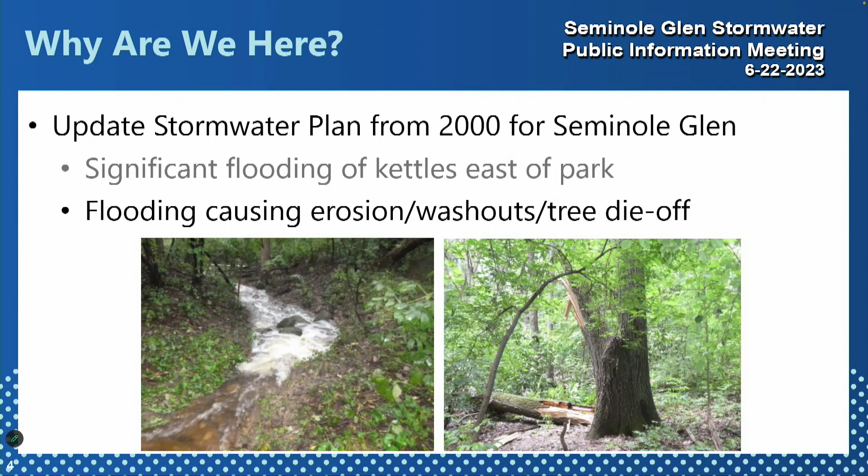One of the things that came out of this study as it got going is that residents also had concerns about water quality, which is an ongoing concern not just in Fitchburg and Dane County, but throughout the state and in all the waters of the U.S. So we're going to touch on that too as we go through this presentation.

Going back to the history of this project, the request for proposals was originally issued in about October of 2021. Some of you may be aware there's been a significant number of staff changes in the City of Fitchburg, which is great, so it just took a while for this project to really get going.

In January of 2023, we had a project kickoff, which involved the first public information meeting here in the City Council Chambers. The meat of that presentation was talking about the goals and objectives, and to really take feedback and comments about concerns and questions, and to give more information about what we were planning to look at.

This is again the project timeline: funding was approved in 2022, in January we had the public involvement meeting, and we'd done some existing conditions analysis at that point. From February until now, we've just finished looking at our 3 to 4 main alternatives and water quality. Right now we are here at public involvement meeting number 2. At the end of June and into July, we'll be finishing the report and doing a project wrap-up.

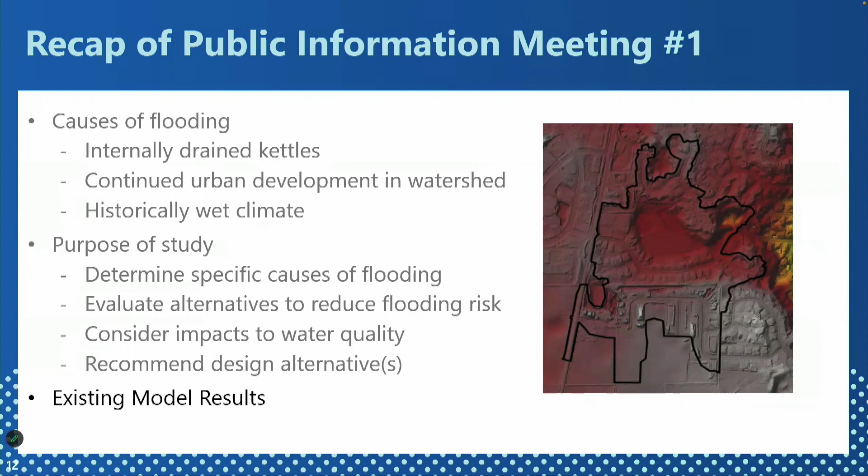So we had also talked about the existing model results, and we'll touch on that a little bit here. This is the outline for this meeting—we're going to talk a bit more about the existing model results as a review, talk about the alternatives we considered and the results of our modeling, and then talk about the recommendations. What do we think is the best approach for reducing flooding risk? And then finally, what are the steps after this project is done? Ben can also talk to that a little more because he's got more inside information on the capital improvement plan.

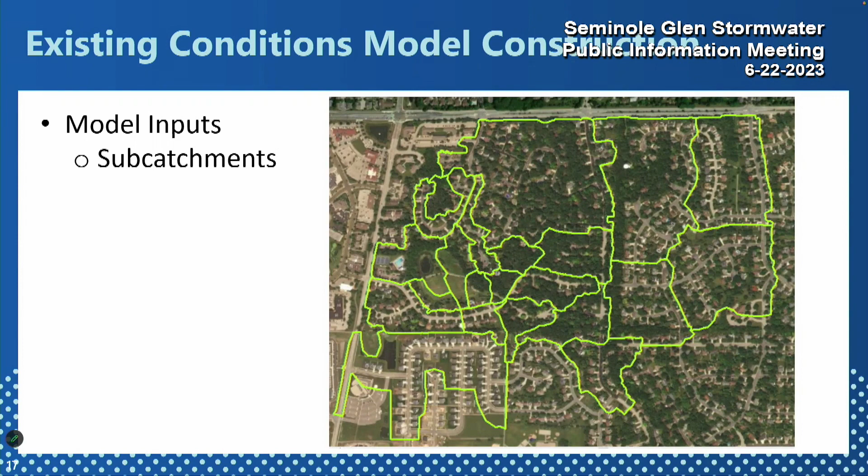So when we look at the aerial photo here, all of those yellow outlines are what we call our subbasins, or subcatchments. Each one generates runoff from the rainfall that falls on it. How much and how fast the water collects depends on many different things: the size of the watershed, is it connected by storm sewer, and what kind of land use is in the watershed. The more houses, the more pavement, again, more runoff more quickly. Storm sewer can also cause water to flow more quickly or collect more quickly.

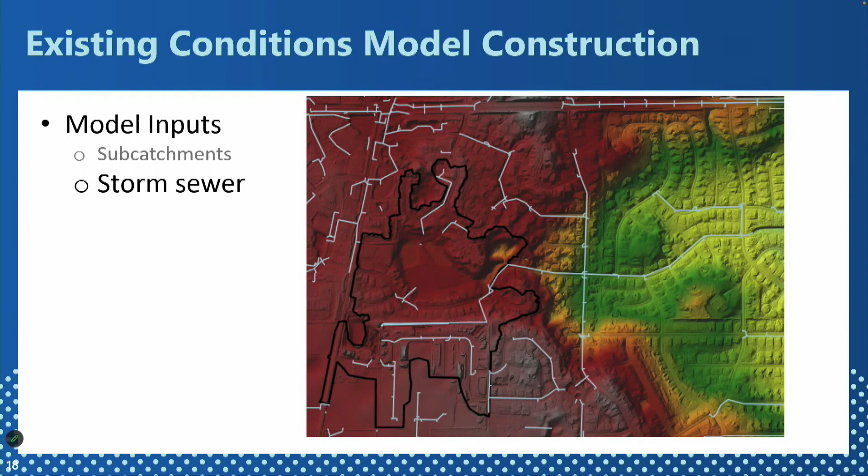So the existing model also looked at storage. The wetlands in the park, as well as the forested kettle at the lower end of the watershed, really behave as large bathtubs. So we actually looked at how big are those bathtubs, how deep does the water get, and once that overtops, how much is overtopping and where does that go.

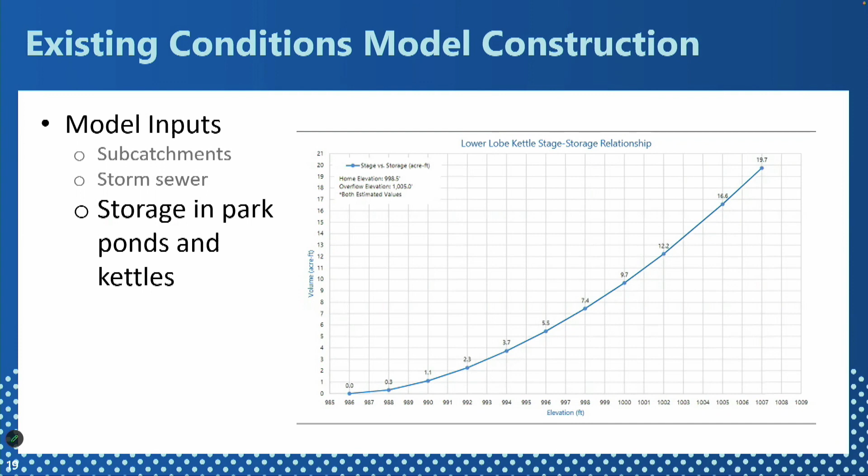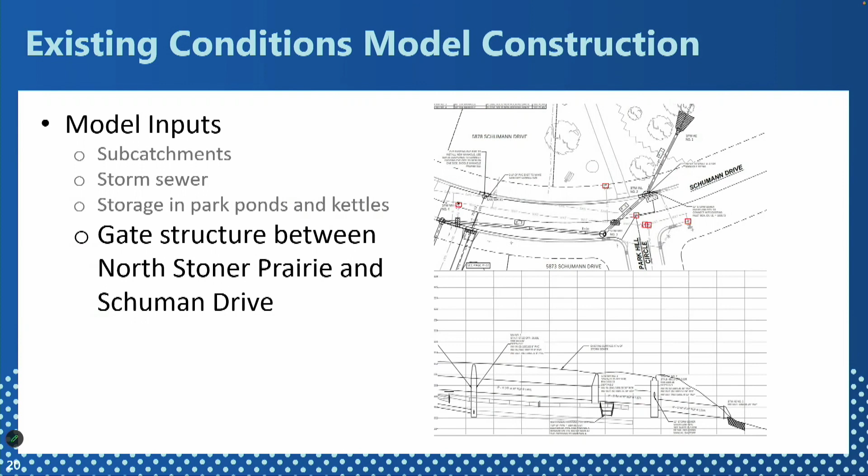So the other thing unique to this project is North Stoner Prairie. When it was developed, as part of their stormwater system, they have a gate which was open during the 2018 event and allowed overflow from their system to get into that lower kettle. That gate has been closed since that event in 2018, but we did look at the impact of that gate, whether it should be open or closed. As we went through this project and looked at alternatives, there was really no upside to opening that gate for any of the design alternatives we looked at.

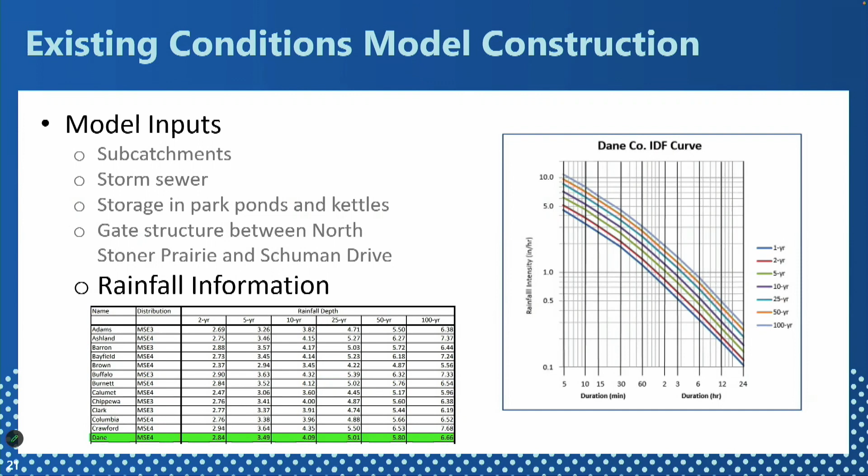And then finally, for the existing model, we looked at rainfall. Again, this is something that is changing over time, and as we gather more data, one of the challenges is we're predicting future rainfall by looking at the past. In some areas, we only have rainfall records going back to early European settlement. And until recently, we were actually doing design in Wisconsin, for the most part, using data from something called Technical Paper 40.

This was a catalog of rainfall that they stopped collecting in 1959. So we were developing current infrastructure based on 70-year-old rainfall data. That's been updated recently in NOAA Atlas 14, looking at rainfall going all the way up to about 2020. It's actually being reanalyzed now for NOAA Atlas 15, looking at changes of climate and the additional risk associated with climate change in the future.

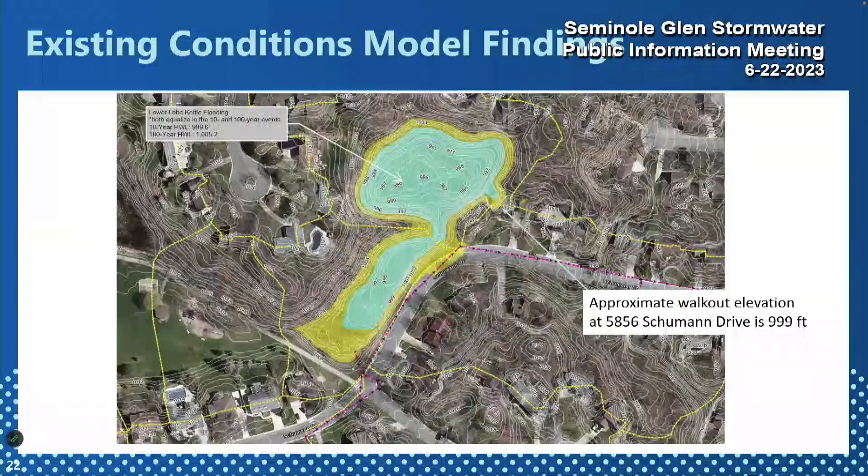So what did we find? Looking at this, especially in the lower area, we found that for the 10-year rainfall elevation, the depth got to about 999.6 feet. And for the 100-year water surface elevation, it was getting to about 1,005.2, at which point it is overflowing and going into Schumann Drive.

The challenge is that at 5856 Schumann Drive, that walkout elevation is approximately 999 feet. So even in a fairly modest event, a 10-year event, which is what we generally design our storm sewer system for, that home could be at risk. So again, overflow to Schumann Drive is definitely occurring at the 100-year event, and possibly even a little bit more frequently.

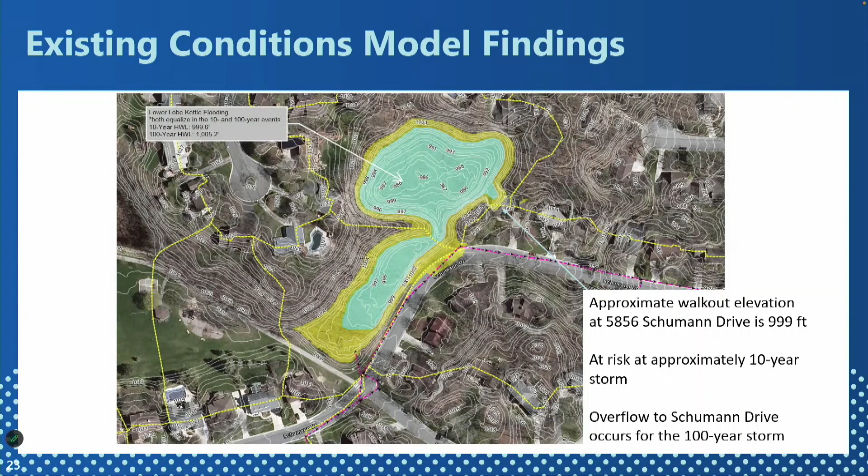Now that we have a handle on the existing conditions, we're going to talk a bit more about the alternatives we evaluated. Alternative one is basically to do nothing. What happens if we just leave the gate from North Stoner Prairie closed and go with business as usual?

Keep in mind that the storm sewer at Schumann Drive is at about elevation 1,000. So that water has to get really, really deep in that lower kettle before it can possibly get into Schumann Drive.

Alternative two is to reconstruct the Schumann Drive storm sewer at a lower elevation with increased capacity. This would also have a passive outlet, so once water got high enough—looking at that 10-year water surface elevation, which has a particular meaning we'll talk about when we get to water quality—that protects the home at Schumann Drive but still allows water to get out of the system.

Alternative three was to construct a berm between the kettle wetlands up in the park and the forested kettle lobes in the lower end, and also to lower the Schumann Drive storm sewer.

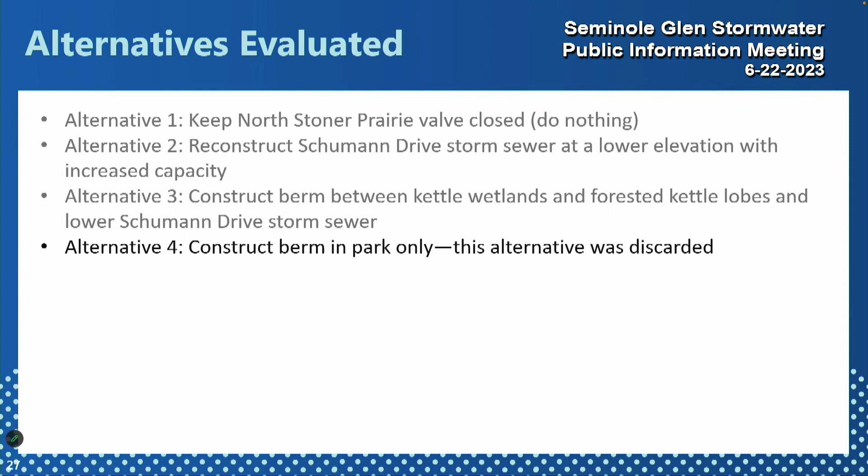Finally, this one we're not really going to talk about much because it didn't have a meaningful impact, was to construct a berm in the park only. That would just increase the storage a little bit in the wetlands within the park to see what kind of impact it would have downstream. While we looked at it in detail, it's pretty intuitive that the kettles in the park are not nearly as big as the forested lobes, and you really can't stack that much water in there to offset what was happening in the forested kettles.

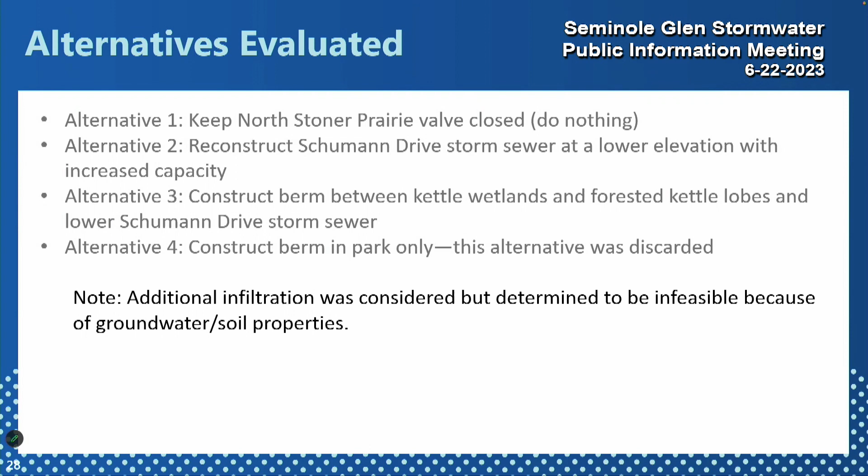We did originally look at additional infiltration, both in the park and other areas, trying to get the water into the groundwater system faster, but it's really not feasible because of groundwater and soil properties. Again, typical with a lot of glaciated kettle wetlands, there's a lot of clay underneath them, so the infiltration isn't great.

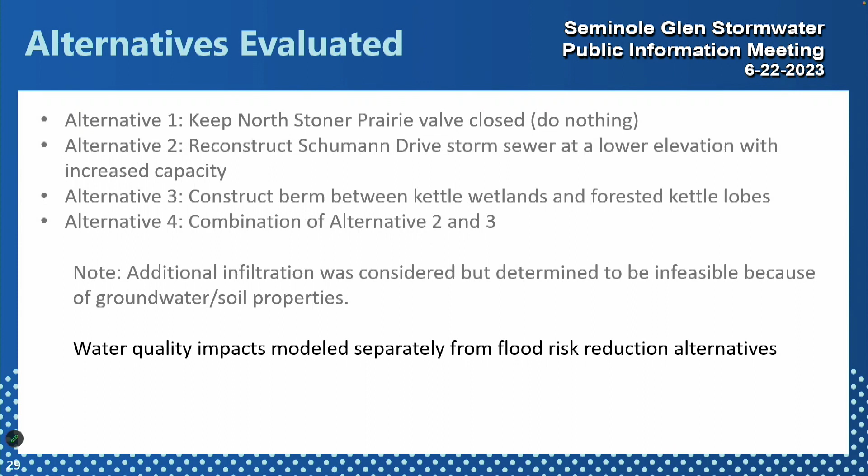Finally, when we talk about water quality impacts, they are modeled very separately from flood risk reduction alternatives. When we're looking at flood risk reduction, we're looking at the 10% annual chance event, sometimes referred to as the 10-year flood. We want to think of that as the storm that has a 1 in 10 chance of happening in a given year. Or even the 100-year flood, when people talk about floodplains, meaning that storm has a 1% chance of happening in any given year.

Now, when we talk about water quality, we're talking about the smaller, more frequent events, because it's those short, small rainfall events that detach the soil and move it away. By the time we get to the bigger storms, the 10-year or 100-year storm, most of what's moved has already moved. The water gets progressively cleaner as the storm gets bigger.

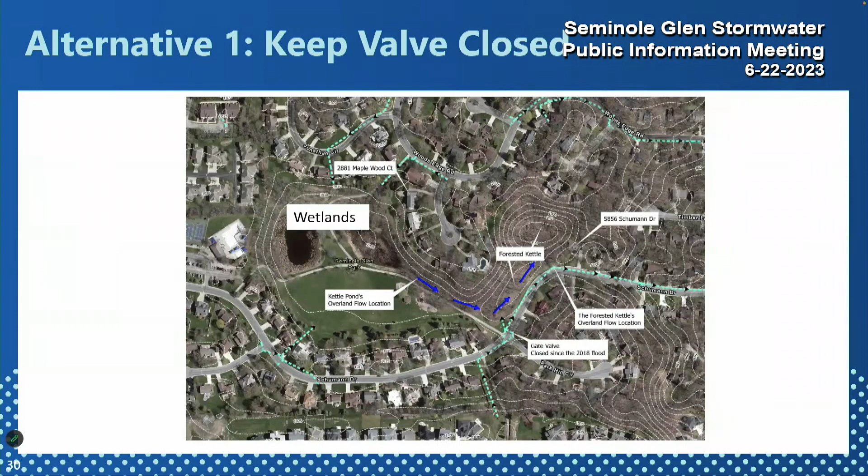So this is a schematic showing what happens if the gate is closed. We have the wetlands in the park, the overflow channel that goes along the bike path, the lower forested lobes, and the gate closed at North Stoner Prairie. We also have the storm sewer down Schumann Drive, but the water just can't get there until it gets deep enough in the kettles.

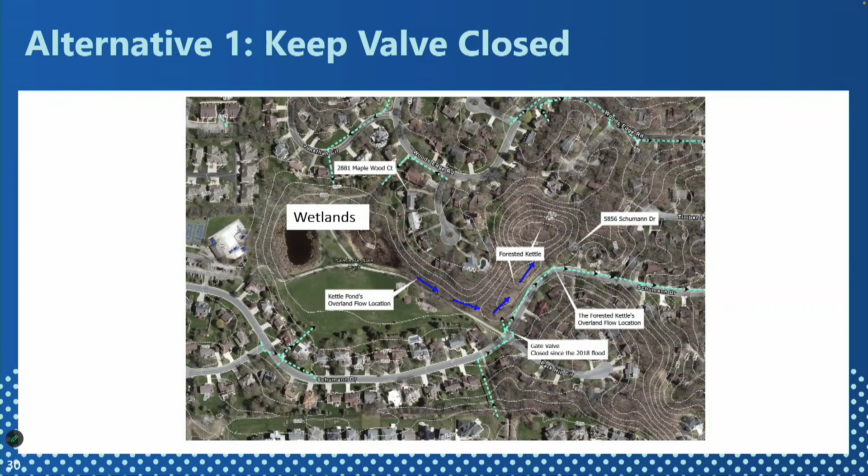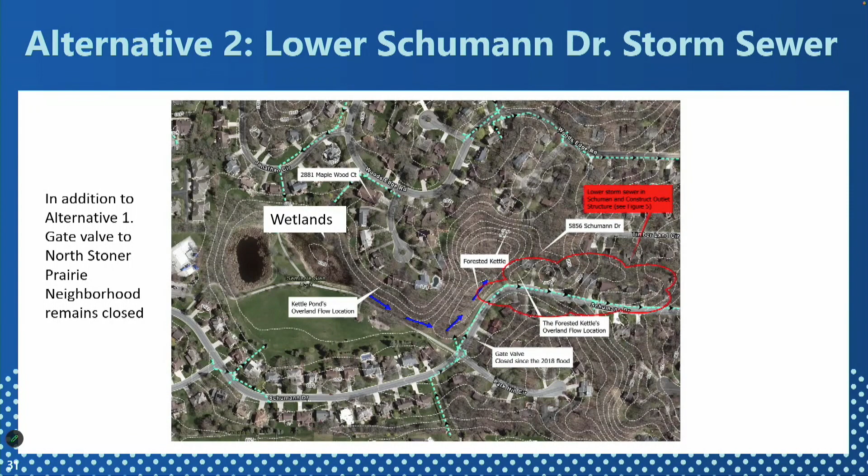We're still keeping North Stoner Prairie gate closed, but where the red outline is, that's the Schumann Drive storm sewer, and that would be lowered. It would also have an outlet, almost like you'd see in a constructed detention basin, to let water passively out of it, and once it gets high enough, it would flow into the Schumann Drive storm sewer system.

This would be a schematic of that passive outlet structure. You'd have a pipe that would be submerged during a storm event. The water would get high enough, it would go over the weir plate in that manhole structure, and the top of that is set at the 10-year water surface elevation.

And then if water gets even higher than that, now you have a grate on top of this manhole that will let water in the fastest and get it down more quickly to that 10-year water surface elevation. So again, the top of the Schumann Drive storm sewer system would be decreased about 992.6 feet, about 7.5 feet lower than it is currently.

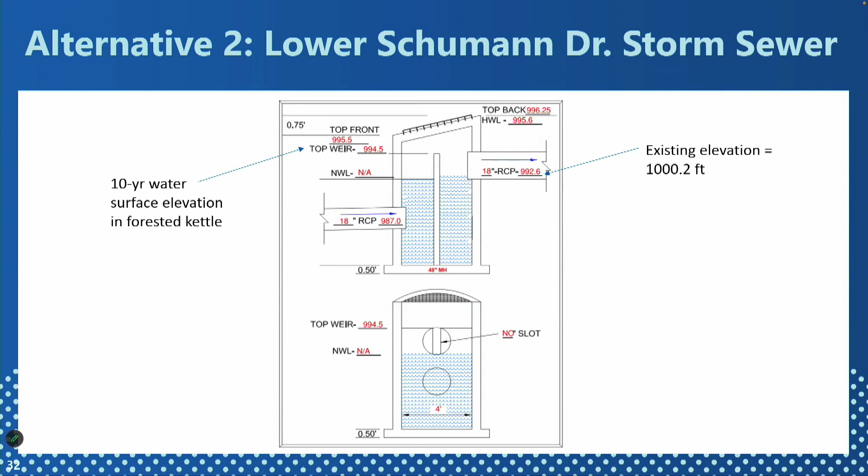So that's the plan for that. Alternatives 3 and 4 - we discounted option 4, which was just the berm in the park. Alternative 3 would do all three things: leaving the gate closed at North Stoner Prairie, lowering the storm sewer system on Schumann Drive as we talked about, and finally adding a small berm between the wetland in the park and the channel.

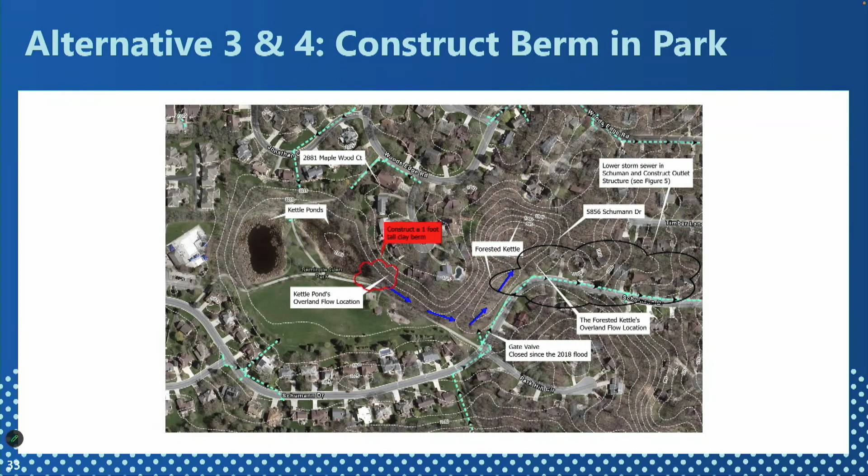And that would have two primary focuses. One, it would back water up a little bit and slow it down coming out of the park into the lower kettle, providing some storage. But it would also reduce velocities into that channel and help reduce erosion, which affects water quality.

So the results - what does this really mean? As you might anticipate, alternative 1, just closing the gate, we see that the 100-year flow rate is out of the kettles upstream, out of the park before we get to the wetlands. So we know that we're not doing anything there until we add the berm, which is alternative 3.

That's increasing the 10-year flood elevation by about 0.2. This is not quite right - we were seeing about a foot of increase, and I need to go back and check this. We were seeing about a foot of increase for the 2-year event because we were putting about a foot. There's an error in the table, and I apologize.

But we're seeing a slight reduction in flows. We're not seeing any discharge for the 2-year event. We're seeing a significant decrease in the 10-year event and a small decrease in the 100-year event. And I'm pretty sure that 2-year flood elevation should have been 1007.3 or 7.2, but I will check, and we will correct this on the website when Ben posts it.

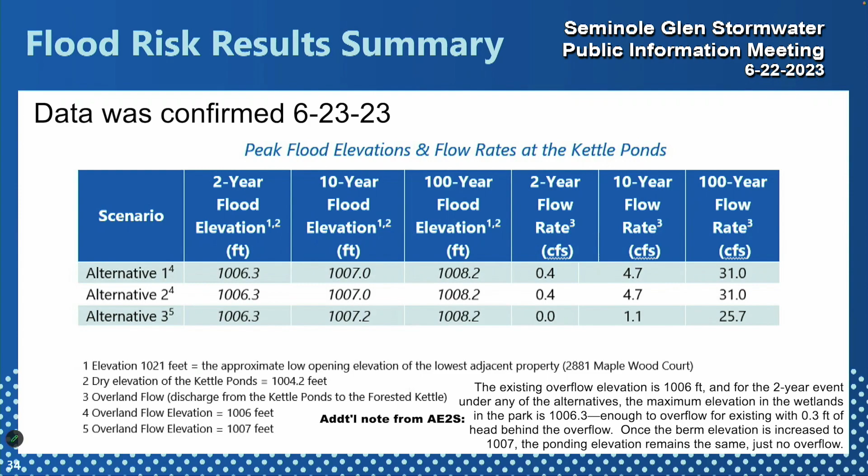So this is at the forested kettles, and this is where the home is at more risk of flooding, right next to the lower kettle. For alternative 1, that 100-year flood elevation is 1,000.9, which puts the home at risk, the walkout basement. That 10-year flood elevation is 994.5.

With alternative 2, lowering the storm sewer, that's where we're seeing kind of the most bang for the buck, so to speak. We're seeing a significant reduction in that 100-year flood elevation, but the 10-year is staying the same because that's where we're setting it on purpose. And now is a good time to talk about that.

The reason we're doing that is when something doesn't discharge water up to the 10-year event, that's considered an internally drained area, according to Wisconsin DNR. And the city of Fitchburg, along with any other community of 10,000 people or more, has to have their discharge permit for their storm sewer system in the city.

And they need to meet water quality standards also for their permit, and also as part of what's called the Rock River TMDL, which is looking at how much stuff, usually phosphorus and sediment, can get into the Rock River, and also many of its tributaries, which are considered impaired, which would include Lake Waubesa, the Yahara River, and Badfish Creek.

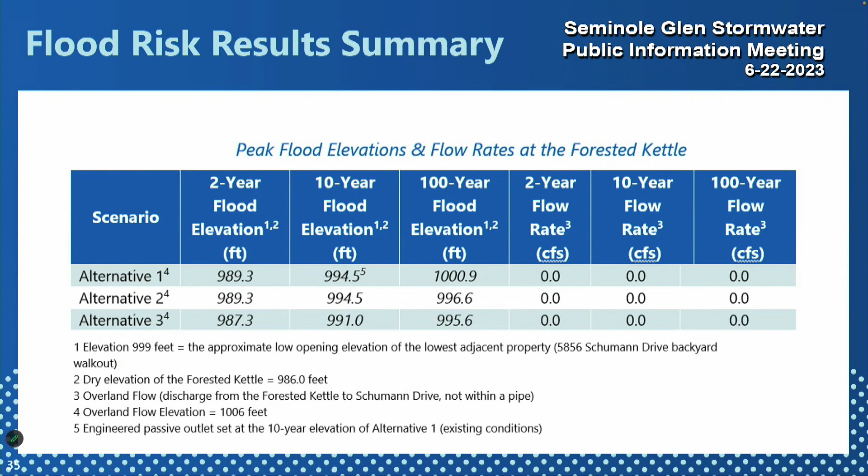With alternative 3, we're seeing a slight improvement in the 100-year flood elevation, so it's providing some benefit, but it would be in combination still with lowering that storm sewer system on Schumann Drive. That's the most important part.

Now I'm going to transition to the water quality modeling. As I talked about earlier, the water quality modeling is based on smaller, more frequent storm events. The approach we used was WinSLAMM. SLAMM stands for Source Loading and Management Model, developed by an engineer here in Wisconsin, and it's used nationwide to predict how much stuff, usually sediment and phosphorus, is generated by different land uses. So a rooftop, driveway, or freeway will produce different loads than, say, a cemetery or golf course. It predicts where these pollutants go within the system. It's based on what's considered typical rainfall for the city of Madison, which is a series of 24-hour rainfall totals for 1981. That sounds odd, but it's used because there are no super dry months and no super huge rainstorms to skew the results.

The upshot is that the runoff quality into the wetlands and kettles is not impacted by our proposed alternatives, because what's coming in is what's coming in. It's the houses that are already there, the rooftops that are already there, the parkland surrounding the kettles. When we look at photos going back to 1987, when it was still all ag land, there were still water quality impacts on the kettles, because they were probably receiving agricultural runoff instead of urban runoff.

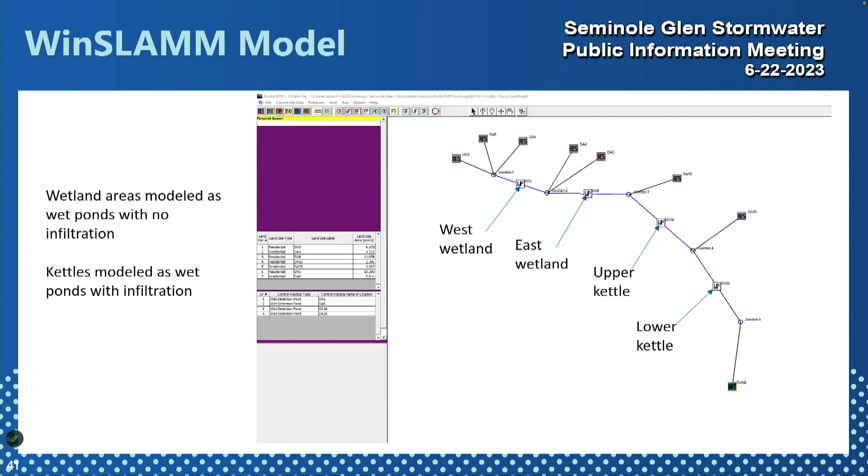So that said, you've got the modeling results that say there's no change, but what can be done within the watershed itself? One of the things Ben has seen is that we know we have some gully erosion going on near the Seminole Hills pool. That's something that should be addressed, and let's talk with them to get that to happen.

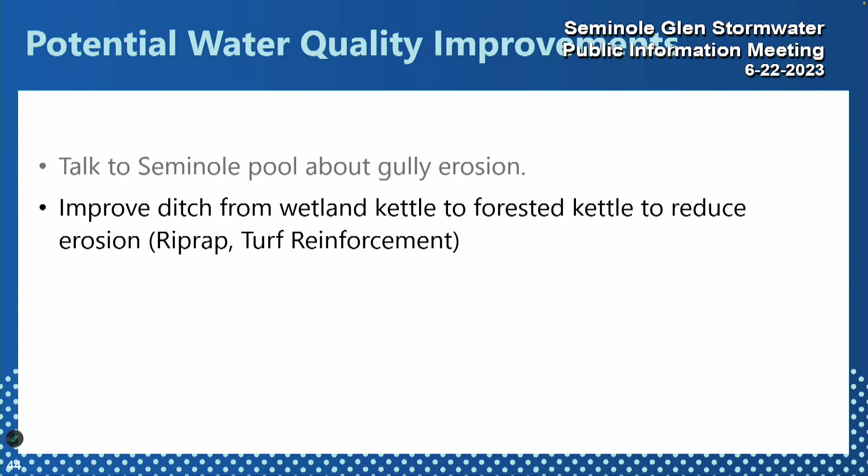One of the things also is looking at that conveyance, the drainage swale or ditch between the wetland kettles in the park and the forested kettle. There's been some evidence of active erosion. What can be done to stop that? First of all, slowing down the water coming from the kettles may help, but should it be looking at riprap, turf reinforcement mat, native vegetation, root wads?

There are a lot of things to look at, but that also requires design. You don't just throw a bunch of root wads in and hope for the best. You have to look at the shear stresses and see what's really going to hold. So that might be something that's done in the future as well.

And then also looking at aerial photos and doing the site investigation, you can see some of the smaller ditches from existing storm outfalls to the wetlands. So there's one that comes along the west side of the park. You can see some erosion in there going into the western Kettle and Seminole Glen Park. So there are also some more opportunities for doing channel restoration within the park and other areas within the watershed.

Public education regarding backyard improvements. We all hear this all the time—things we can do to not let water run off our properties. Disconnect your downspouts. So if it drains to your driveway now, let it drain to the grass instead. Build a bioretention or a rain garden in your backyard. The hummingbirds and the bees love those, in addition, so you get entertained. And also rain barrels—collect your roof runoff in a cistern and use it to water your plants. So these are all things that not just the city of Fitchburg is focused on, but Dane County as a whole.

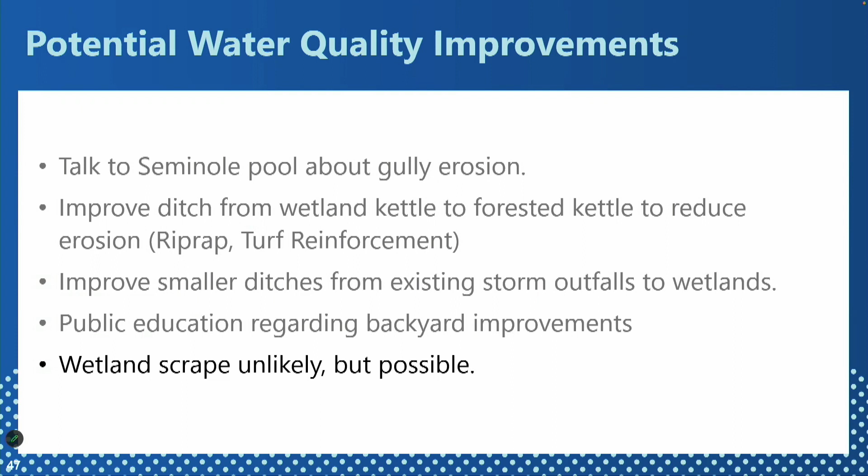And then finally, there is the potential for doing a wetland scrape, but it's probably unlikely. It's been something that's been talked about in the past. I think it may have been done at one point a long time ago, maybe 22 years ago—one of the lobes may have been dredged. There's evidence, maybe. So these are things that we're all looking at for the future.

So finally, what are the next steps? As I indicated, we're working on documentation right now. The report is 99% done, except for that typo we found. The next step would be design and construction of the planned improvements. At this point, they're looking at 2023-24 for the berm in the park in the capital improvement plan, and Schumann Drive storm sewer would be part of a reconstruction project along Schumann Drive planned for 2025 at this point.